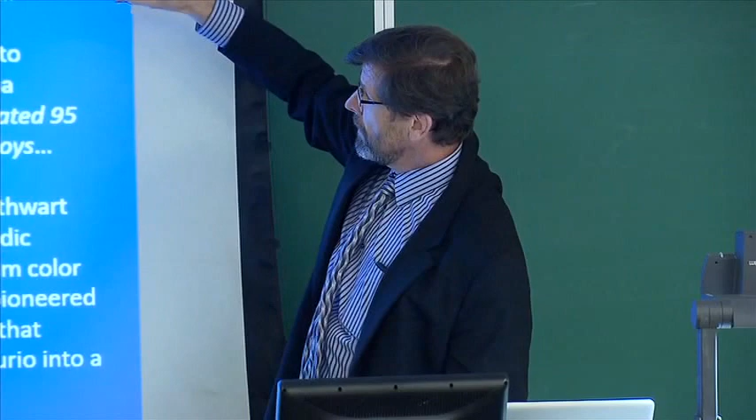The green light, the other meaning of the green light, was they got the permission to spend $30 million on the tech center. If I plug this into the Google calculator for inflation, that's about $240 million today.

So the investment in basic science was equally recognized, as much as education, as much as practical application. And the reason is this connection: it is basic science that really underpinned all of the technical applications of aluminum. Without the basic science, aluminum would still be sort of a curio. With basic science, you can turn it into something that performs in highly demanding engineering applications.

So the third generation is the lectureship. The endowment from Kent created the library. The endowment was sufficiently substantial that the next generation of Van Horns, Neil and Karl, were able to set aside some of those resources in order to endow this lectureship. And it has been running since 1974.

If you just look through the list, you'll see many names you recognize. We've had one leader in the field of material science and engineering after another come and speak to us and spend a long period of time and directly interact with the students. That's one of the real other dimensions of connectivity that's treasured about this series.

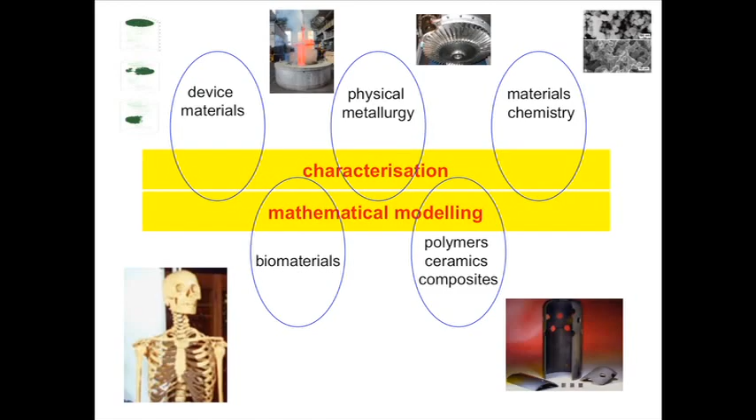And there's another subject key to all material science subjects: mathematical modeling. There used to be a time when it would take approximately 10 to 15 years before an idea made it into commercial success. That is no longer acceptable in industry—you have to take your idea and show it's viable within something of the order of 5 years. Rolls-Royce make aero engines, and they will not wait for you more than 5 years to get something flying in the engine.

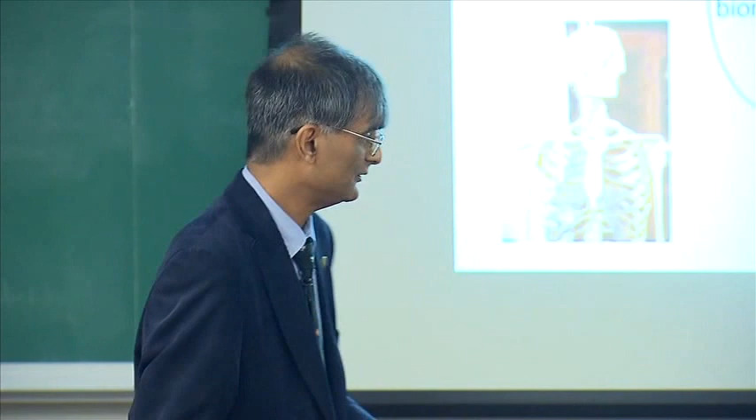Now, to do this, we have to reduce the timescales and resources used to create new materials. One way—and this is just a tool, just like an electron microscope—is to use mathematical models to cover as much information as you can so you can get to your goal faster.

And these mathematical tools are now quite common, and they form part of the language even of undergraduate students. So, for example, this is a book, quite a small book, about introducing materials modeling.

Every single method that exists at the moment for doing calculations and trying to design materials. And in that book, we cover electron theory, molecular dynamics, thermodynamics.

Irreversible thermodynamics is a subject between thermodynamics and kinetics. We have kinetics, which is a very badly behaved subject, finite elements, and the key aspect of material science is that we have structure property relationships. That is the essence of materials science.

Given that we are not a pure subject, that means we don't treat a chicken as a sphere. We have to treat the chicken in the complex shape that it exists. We will have lots of uncertainties, and the treatment of uncertainties is an extremely important part of the problem.

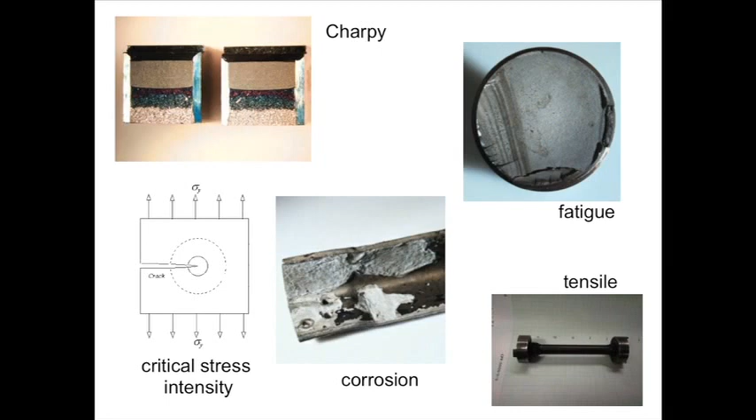It's a completely empirical test, but it's widely used. No one can predict that. Similarly, the fatigue strength cannot be predicted. This is the fracture toughness, corrosion, even the simple tensile test. We cannot predict the stress-strain curve. These are extremely complex problems.

So how can you design a material if you can't predict the properties? The engineer is not interested at all in whether you have GP zones in your material or you have a nanostructured material. They want to have properties with which they can design a component which will be safe over the service life that they calculate.

So to summarize, all these properties can be measured. We have all the necessary instruments, down from looking at individual atoms to engineering scales which cover kilometers of pipeline. And the pipeline has to be designed in such a way that if a crack starts, it doesn't propagate for kilometers.

We can use these measurements, so all of these properties that I illustrated as an example, you can use them to make sure that your best estimate says that your engineering component will be safe over a certain design life. So we can use these measurements to estimate life, to control, etc.

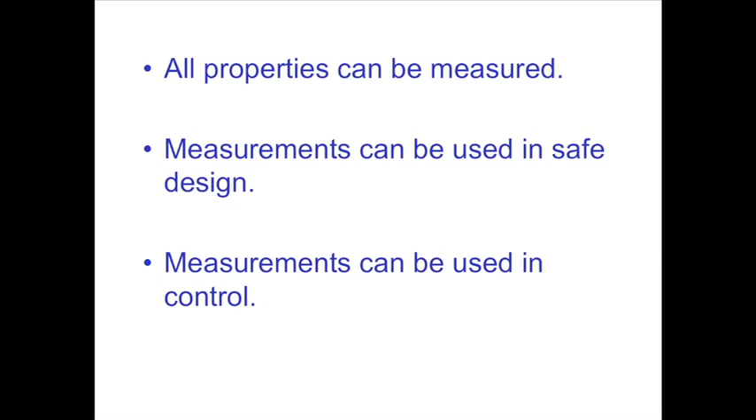But if I gave you a comprehensive description of the material, that means the full chemical composition of a steel with 20 different solutes in it, and exactly how it was processed, and the details of the structure at whatever resolution that you like, you would not be able to predict any of those properties. So this is what I mean by a complex process, and I'll give you some example of that.

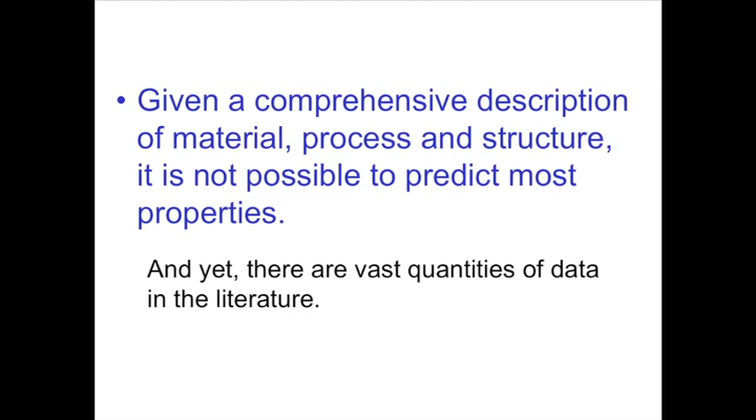So one advantage is that there exist vast quantities of data in the literature, really truly massive quantities of data in the literature. We need to do something to understand those data without simplifying the problem. Because once you simplify the problem, you lose the technology.

Even the simple hardness test, so these are hardness indents. And when we teach about hardness, we say, okay, we make a diamond-shaped indentation, right, and measure the depth to which it penetrates the material. But actually the problem is far more complex. You can see that the region around the indent has been pushed up in a complicated way. So even to predict the hardness is not possible as yet as a function of all the variables that I illustrated.

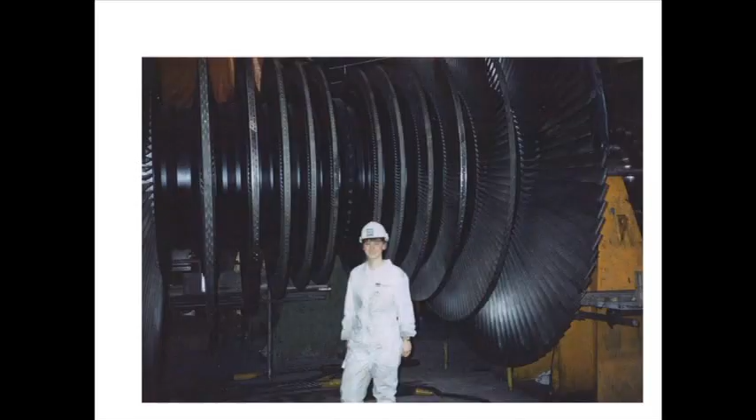Now this is a steam turbine, and this is one of my former PhD students, Tracy Kuhl. You know, this thing rotates at about 3000 revolutions per minute. The steam temperature can be 600 degrees centigrade, and it's very long along this direction. It's got to last for something like 40 years.

So to ask a question, how can I make this operate at 650 degrees centigrade and make sure that the materials will survive over that period is really tricky. You're not going to wait for 40 years to test your alloy. So we've got to have a method of dealing with this problem, and I'll illustrate some of the variables involved.

So here we have complex chemistries where everything is added deliberately. I'm not illustrating impurities. Some of these elements are added in parts per million and controlled accurately. Boron, for example, is added in parts per million. So we have all these alloying elements which form our basket of things that we can add to the steel.

There's processing involved, rolling, forging, heat treatment, etc., multiple heat treatments before and after welding, and so forth. There will be different kinds of welding processes, and they will have their individual control parameters, and there will be final quality heat treatments. Quality is the term they use for the final heat treatment.

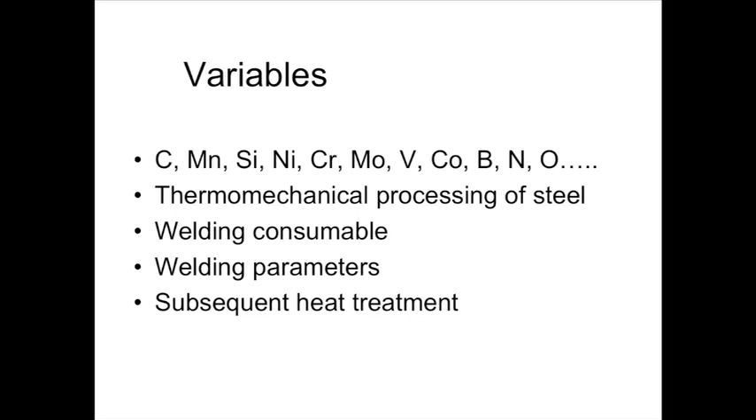So if you simplify the problem, you basically lose the technological goal of the analysis. So how do we deal with this?

Well, first thing is that there is no reason for anything to be linear. We have to have nonlinear functions, and we have to be able to deal with a very large number of variables. If you are modeling a rolling mill, there might be approximately 400 different variables. A modern rolling mill actually has these models so that it automatically adjusts the conditions so that you get the right properties.

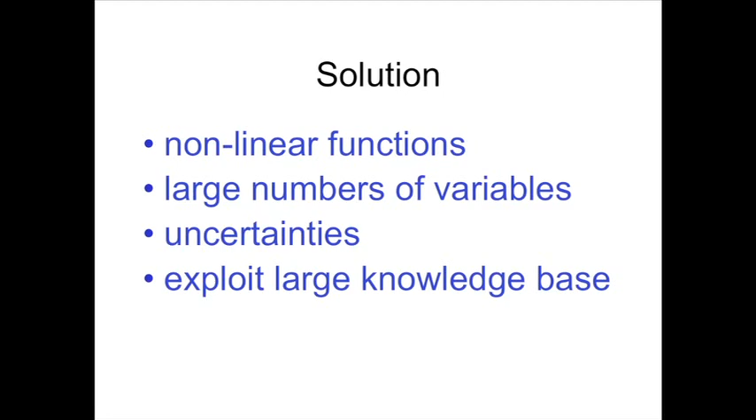This is extremely important. We need to deal with uncertainties in our calculations, and we need to exploit as much data as is available. It's a very painful thing to collect all the data that are available, and in many cases the publications don't report all the data that you need. So you need to have a method to deal with missing variables.

Okay, so the first thing that everyone is familiar with is an empirical equation. Supposing I'm trying to predict the strength of a material, I might write it as a constant times the concentration of carbon, plus a similar term for the manganese concentration, and then for the nickel concentration. So it's a linear equation.

These variables are assumed to be important, and we have also assumed that the problem is linear. So you present this to your supervisor, and he says, no, I know that carbon and manganese interact with each other. So you go away and you treat the data again, and you introduce arbitrarily a product between carbon and manganese.

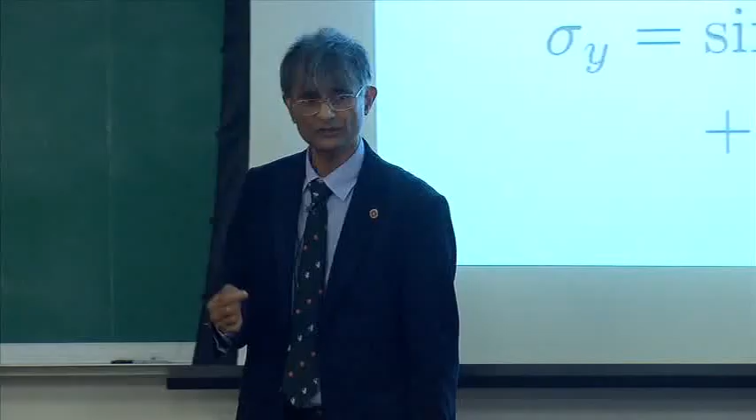When I was coming to the US on a previous occasion, the US immigration officer asked me what I was coming here for. So I explained that I'm going to give a lecture on a neural network, and I thought I should explain a little bit more, which was a mistake, because I said, look, it works a little bit like the brain. And actually it's not at all like the brain, but neural implies something to do with the brain. So he said to me, I wish my boss had a neural network.

Here is a representation of that first empirical equation where we had the property, in this case toughness, as a function of carbon, yield strength, and phosphorus content. I'm going to represent that linear equation in terms of a neural network. Here are the input nodes, your input variables: carbon, yield strength, and phosphorus concentration. And this is what we are after, we want to calculate the toughness.

So I take the carbon concentration, multiply it by an arbitrary number, which we'll call a weight. I take the yield strength, multiply it by an arbitrary number. I take phosphorus, multiply it by an arbitrary number, add them all up here, and I get a value for toughness, which will obviously be wrong unless you're very lucky. So you compare your calculated value with a measured value, and modify the weights until you get a good match. That's basically linear regression.

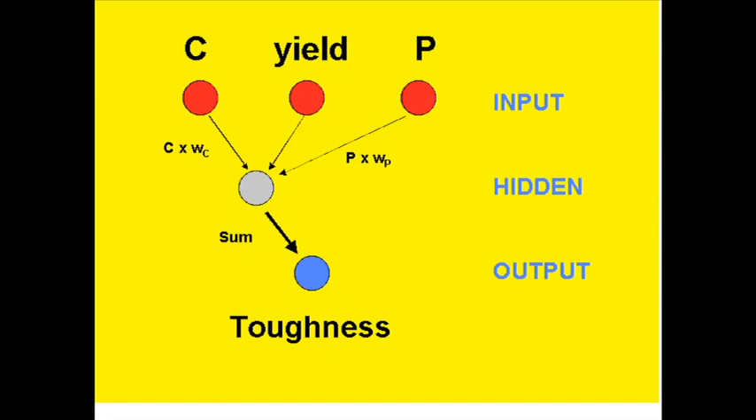In the previous slide, I had one hidden unit where I added everything up. Let me go back to show you. We have one hidden unit here, so we take carbon, multiply by a certain weight, and so on, and add them up here. I can have a second function here where I multiply by a different weight, and instead of doing a linear addition, I take a hyperbolic tangent of those products. By using two hidden units, I can make the function more nonlinear.

This is exactly what we are doing here: using two hidden units, two hyperbolic tangent functions. Carbon multiplied by a weight, take a hyperbolic tangent; yield multiplied by a weight, take a hyperbolic tangent, and so on, with two different sets of weights. This is the equation representing that neural network: the output is given by your input variable multiplied by a weight plus some constant, just as in linear regression. At hidden unit 1, you take a hyperbolic tangent of that summation, and you do the same at hidden unit 2, then predict your output value of toughness. If it's not correct, you go back and modify the weights.

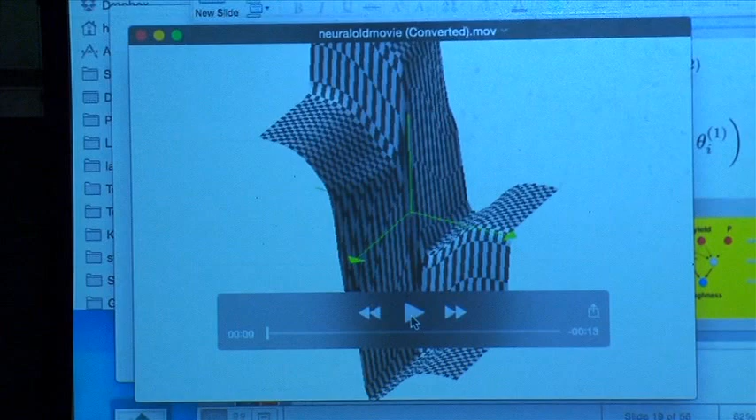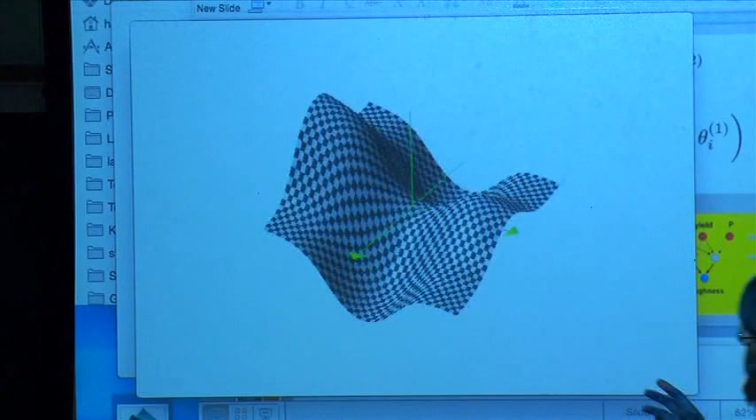To show you how complex a function you can get from a simple combination of hyperbolic tangents, here's a movie showing x, y, and z as our output. X and y are two variables, and I'm only using 4 hyperbolic tangents. As the movie runs, you'll see how that function changes simply by altering the weight. This is the same function, all I'm doing is altering the weight, with 4 hyperbolic tangents here. You can see I can make this surface sing and dance by altering the weights. It's an extremely flexible mathematical function.

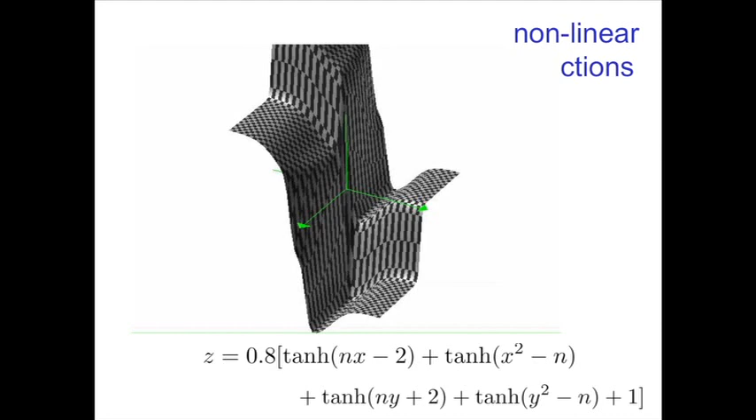That's the reason for using the hyperbolic tangent, it isn't that I had a bad dream. You can see this is not a black box, everything is explicitly defined in this equation. The complete description of the neural network is that simple equation. This was the function I was plotting, you can see there are 1, 2, 3, and 4 hyperbolic tangents, and all I'm doing is varying the weight, and the shape changes dramatically.

So you have to be brave and answer. Which one is correct? The higher order polynomial is extrapolated beyond the data range, so that wouldn't be right. It depends on your criteria for matching, whether you use least squares or least to the power of 10 - whatever you choose.

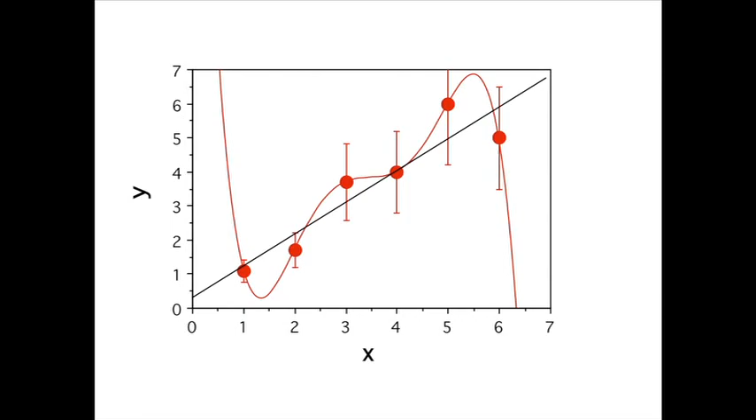I don't know what the function should be. If I have a neural network which is so flexible, I can make it pass through every single point with 0 error. But, as you said, is this a correct extrapolation? It could be, or this could be the correct extrapolation. So how do we deal with this?

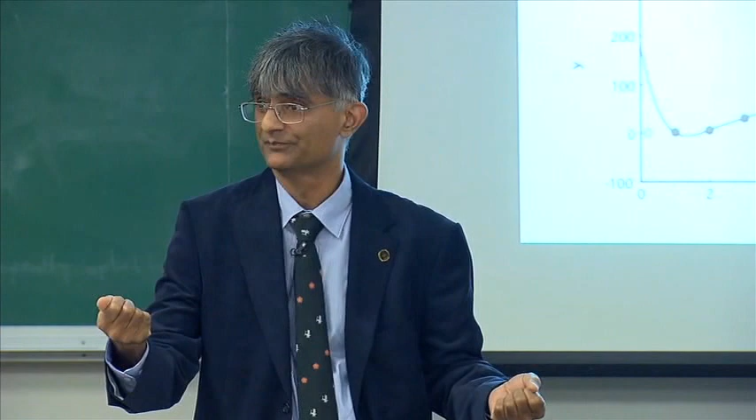Okay, the solution is very simple. I have data, and I split the data at random into two parts. One data set I call the test data, and one I call the training data. The training data are those which I use to create the function, and the test data to interrogate whether the function behaves properly.

So the black points are the ones I've used to create the model, and the white points are my test data. I'm plotting the error in the training and test data as a function of the complexity of the model. Here the model is actually too simple to capture the complexity of the data, because we're predicting the unseen data incorrectly, so we get a high test error and a high training error. In this case, I've made the function pass through every single point in the training data, and therefore it behaves badly - it's overfitted because it behaves badly on the unseen data, so I get a large test error and a small or 0 training error.

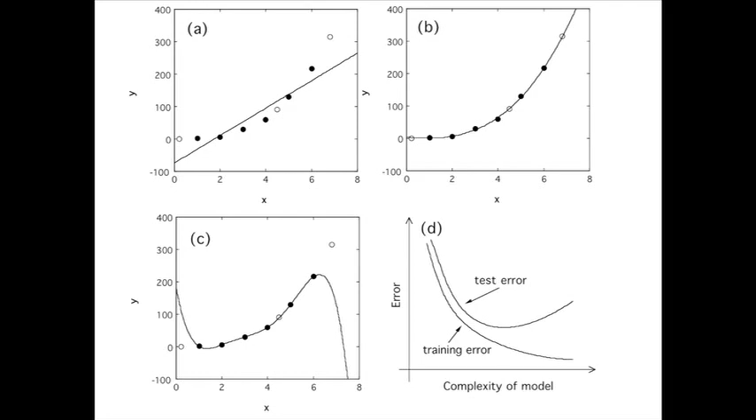This is an optimum model because I minimize the error on the unseen data. That way you can fix the complexity of the model by saying, look, I'm not overfitting here - I've got a minimum in the error on unseen data.

Just a clarification - training has confused me. Training implies change, but what that's really saying is how well does that line approximate the filled circles? Correct. Yeah, so we are finding the coefficients, the W, for fitting the function and checking how well it fits those data points. And when it passes exactly through those data points, the training error is 0.

Now, here's another illustration. Can somebody predict the next two numbers in the sequence? How about you, since you're at the front desk, you're a good student? Well, I want to say 10 and 12, but you're probably going to pull it up and it's going to be like 491. No, you're absolutely right.

So the next two numbers are 10 and 12. But they could equally well be 8.91 and 7.64, because this function here exactly represents the sequence 2, 4, 6, 8. If I put 2 in here, I'll get exactly 4. If I put 4, I'll get exactly 6. If I put 6, I'll get exactly 8. If I put 8, I'll get 8.91, and the next one will be 7.64. So 10 and 12 are exactly correct, and so are 8.91 and 7.64.

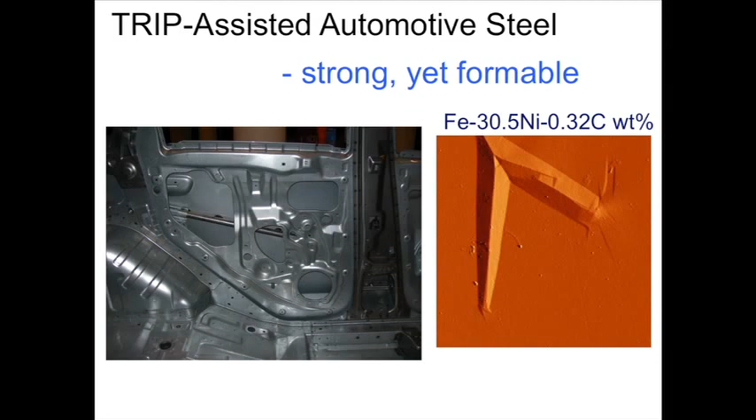And one method, named TRIP, comes from the US, where - now who was it? Parker, Zackay and Parker, that's right. They did some experiments on fully austenitic steels, and when they pulled them, they found extraordinary ductility. And the reason is that phase transformation happens under the influence of stress, and that phase transformation causes a change in shape, a shape deformation, which is a small addition to ductility, but more importantly, it adds to work hardening capacity, and therefore you do not get a plastic instability early in the deformation. If you don't get a plastic instability, you can stretch it much more. So these alloys are too expensive for normal use, something like 30% nickel.

This is a very clever alloy in which you produce austenite, which will transform under the influence of stress or strain into martensite, but incredibly cheap, using carbon as an alloying element. Now, you can't use a large carbon concentration because you have to be able to weld these things. There's approximately 3,000 to 5,000 spot welds in every car, and if those do not pass rigorous tests of fatigue and so forth, your steel will not be used. Simple as that.

So notice that the carbon concentration is very small. So how do we stabilize the austenite? If I quench this material, it would transform completely into martensite and there would be no austenite left. So what they do is first form about 70% of ferrite at a high temperature. When the ferrite forms, it partitions carbon into the rest of the austenite. So even though your average carbon concentration is 0.15, the concentration in the austenite is much greater. And you increase it further by transforming at a lower temperature into bainite, which also partitions carbon. So you end up with about 1.28% of carbon inside the austenite, even though the average is 0.15. You can't get a cheaper alloying element than carbon. In fact, during steel making, you remove the carbon from the iron that comes out of the blast furnace.

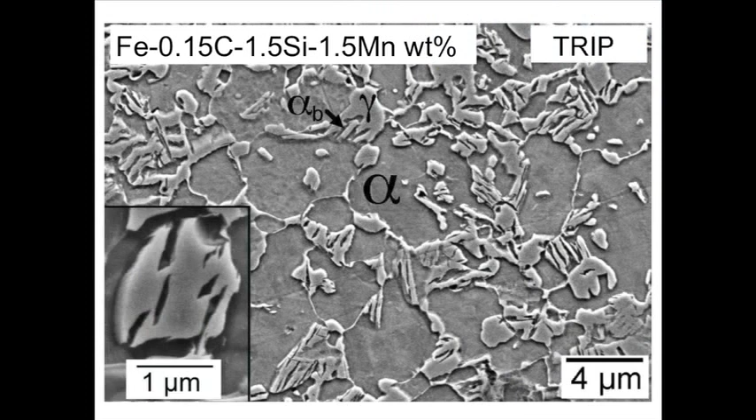So this is called a trip-assisted steel, and it has a very simple composition, and notice the silicon.

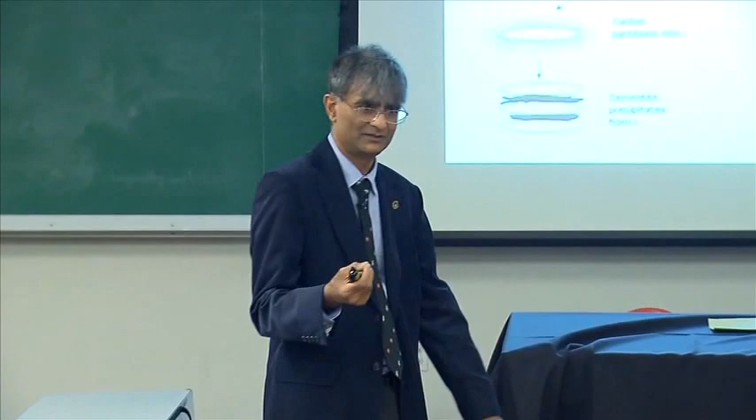As Professor Lewandowski said, bainite is my favorite topic, and I've worked on it for about 40 years, and I'll summarize all that in one slide here. So basically, it forms exactly like martensite - it's a diffusion-less transformation, but it's forming at a temperature where the carbon is mobile. So shortly after transformation, it escapes into the remaining austenite and then precipitates as carbides, iron carbides. But if we stop this reaction here, then we end up with a mixture of ferrite plates and carbon-rich austenite.

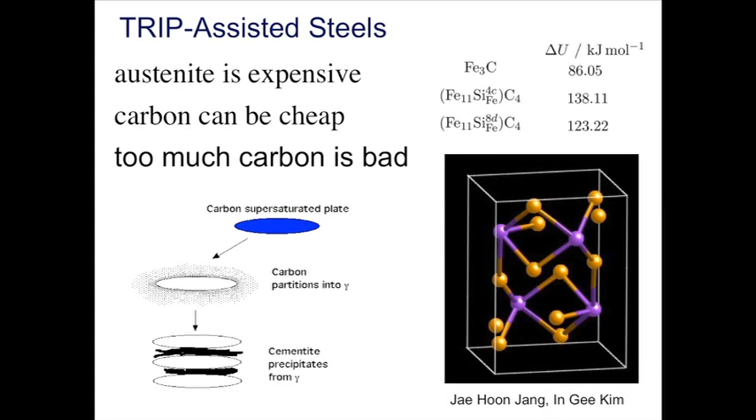And the way to stop this reaction is - this is the cementite unit cell, Fe3C. If I pull out an iron atom and substitute it with silicon, then you can see that the energy goes up dramatically. Cementite hates silicon. So if you add a small amount of silicon to your steel, then cementite will not precipitate in these circumstances. So the role of silicon is basically to allow us to produce austenite, which is rich in carbon, and not to lose the carbon by precipitating cementite.

And the second thing about this bainite reaction is that there is a shape deformation. So this is an atomic force microscope image where you take a crystal of austenite, you polish it completely flat, and then you allow it to transform into bainite. Then you get these massive deformations, which are good for work hardening. And work hardening prevents plastic instability.

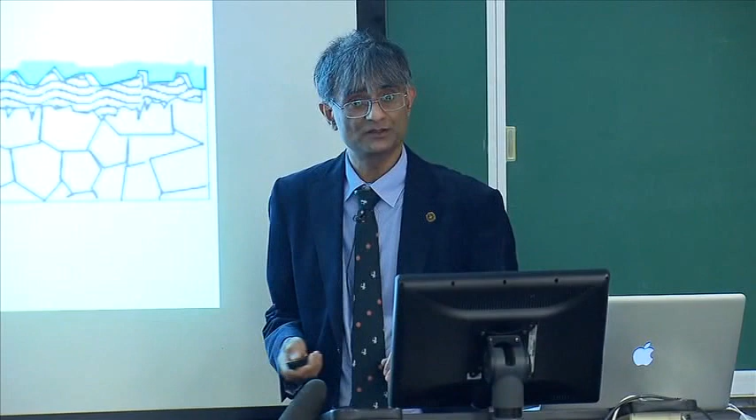So these are called TRIP-assisted steels because the amount of austenite is quite small - it's about 15%, and it's produced by this partitioning of carbon. But as your wonderful student pointed out, there's a problem - silicon forms an oxide during the processing, which is called fayalite, Fe2SiO4. And that can be liquid at your heat treatment temperature, so it penetrates the steel and locks itself to the steel.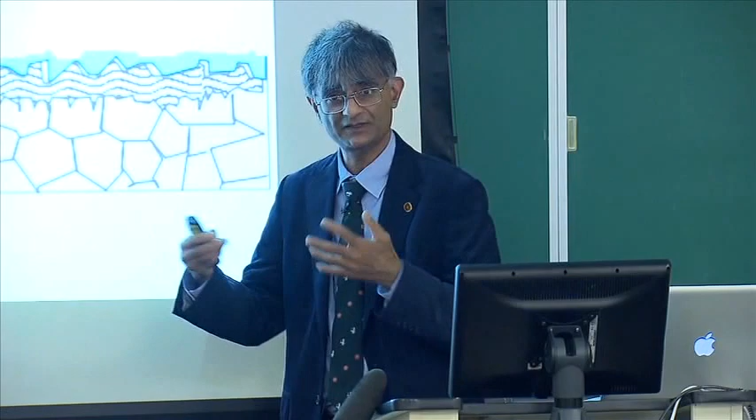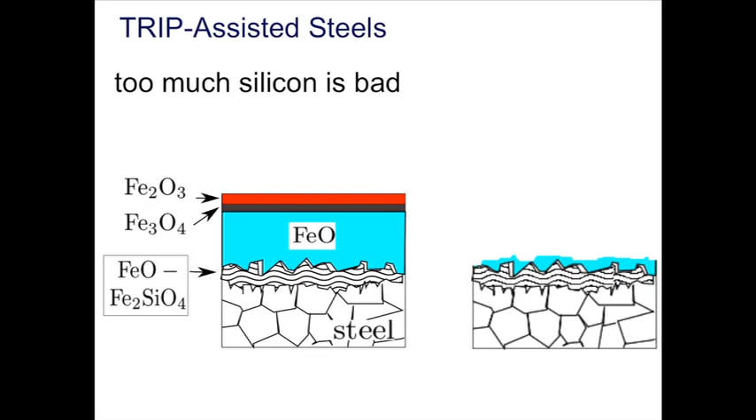So when you come to remove the oxide by the processes that I have in the steel industry, you are left with some remnants of this iron oxide because it keys with the fayalite. And that iron oxide then oxidizes to a red colored oxide, which is unacceptable just from looking at the steel. But it's even more unacceptable when you go to coat it with zinc because it doesn't wet at those points. So we don't really want any blotches on the surface, external surfaces of a car body. Yeah, you wouldn't buy it.

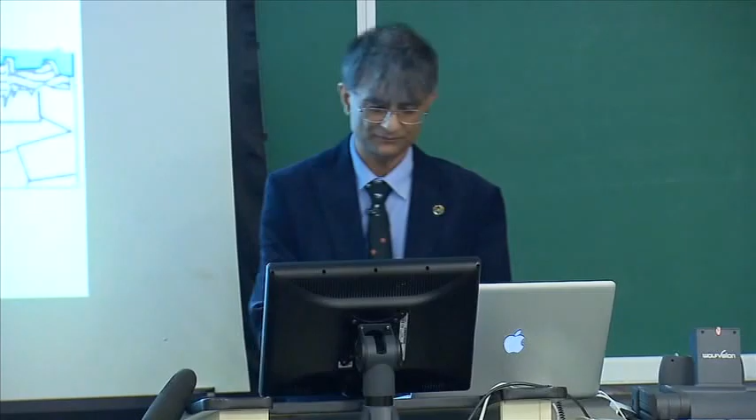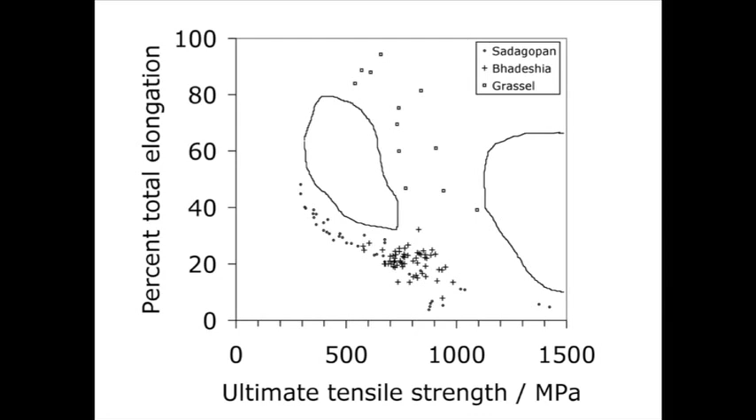So how can we solve this problem? Well, there's an awful lot of variables in producing this steel, and I'll just show you the properties that we are after. So if I take all kinds of automotive steels and I plot the strength and the elongation, which is important in formability, against strength, you get the so-called banana plot - as you increase the strength, your ductility goes down. There are some special steels called twinning-induced plasticity steels, which are rich in manganese, which have a higher combination of strength and elongation, but they are actually very expensive. So we have these large gaps here, and if you can fill those gaps, then you would become rich.

Now remember that you're not simply going to look at elongation and ultimate tensile strength. There are so many properties that have to be satisfied before a car manufacturer will accept your steel, but I'm keeping the story simple here.

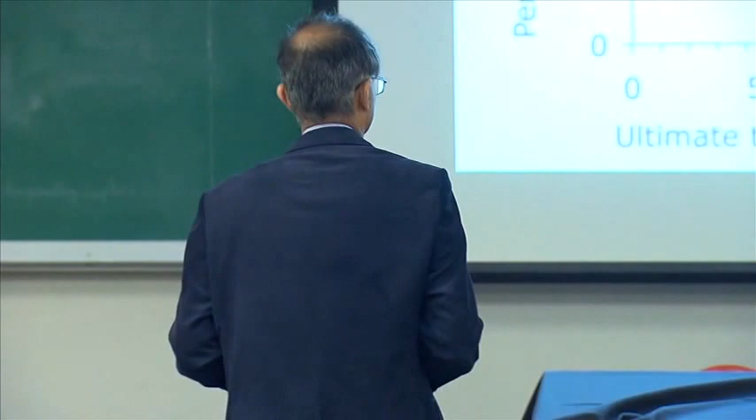This is ideal because there are thousands of papers on trip-assisted steels where people have varied many things and produced good experimental data. So we collected that data and created a neural network model, asking: I do not want a silicon concentration more than 0.5%, but I want the following properties - a certain amount of retained austenite, certain elongation, and certain strength values. Find me a steel composition. So you connect the neural network to a genetic algorithm, which tries out many different values of these variables, looks at whether you're within the acceptable range, and finally gives you a set of answers.

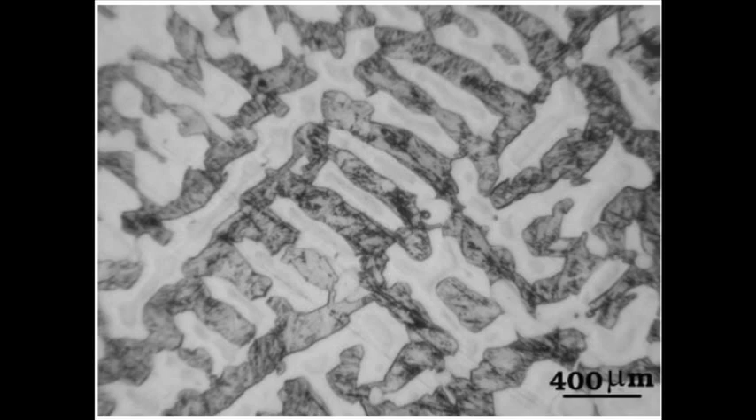And the chemical composition that was predicted is as follows: it's actually saying I can achieve all those properties with high carbon concentration, 0.40% carbon. Remember we have variables which control spot welding in the model. And silicon - we obviously force the model not to have more silicon than 0.5%. And it's increased the aluminum concentration to 2%.

And when we did a phase diagram calculation for this, you can see why we have that delta ferrite - the alloy can never become fully austenitic. Now that's an advantage. It doesn't matter whether we have delta ferrite or ferrite produced at low temperature - it's ferrite and it will partition carbon as we want. Furthermore, if it never becomes fully austenitic, it can never become fully martensitic.

So when you spot weld, you have very rapid heating and very rapid cooling. If you have a high carbon concentration, you get brittle martensite forming. But if you cannot form 100% austenite, you cannot form 100% martensite. That has to be good for spot welding.

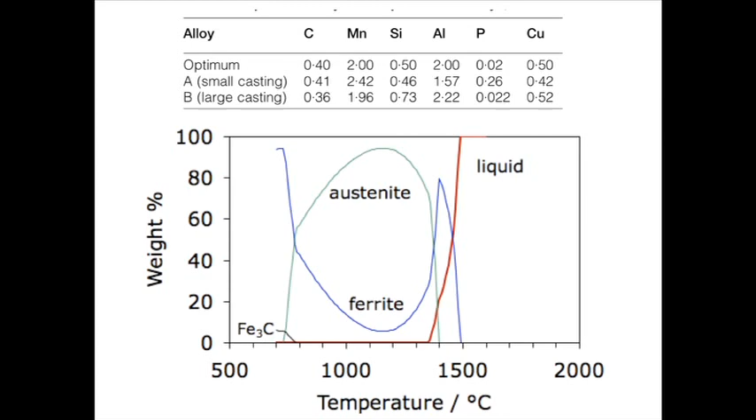Now, the way you work with mathematical models is you make some prediction, and there are uncertainties. So you do not make a large quantity of material - you first make about 60 grams of material to validate your prediction. And if it's going roughly in the right direction, you make a larger casting. Of course, when you make these castings, the compositions won't be exactly correct.

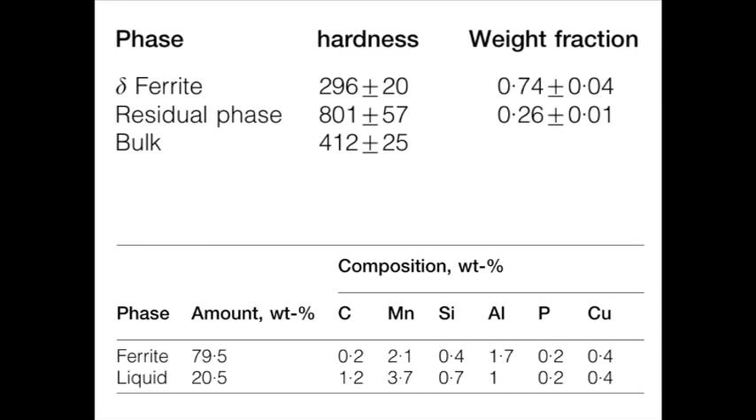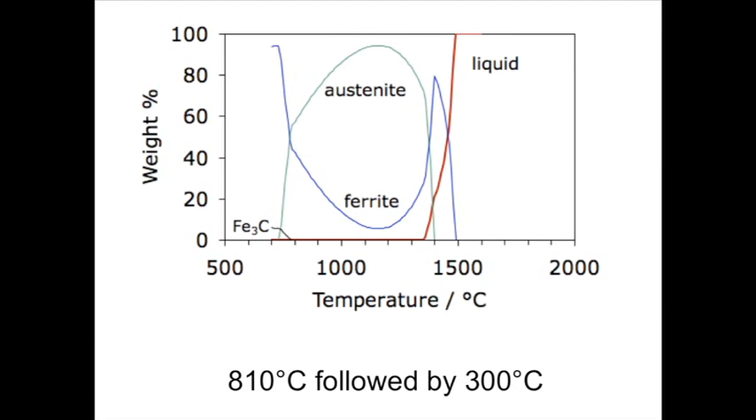This is the constitution - there's about 80% total of ferrite, and then the remaining liquid solidifies into austenite. This is now the recalculated phase diagram for the actual alloy we made. And we then heat treated this alloy to produce bainite in the regions which are austenite, so it looks slightly different here.

So this is the very first alloy - there's no making 10 alloys and choosing. We have the bainite and retained austenite here, and this is the delta ferrite that is unchanged from solidification. And the very first alloy produced incredibly good properties. For an automotive steel, this is very high strength, 1000 megapascals, and you have uniform elongation of the order of 22%.

Uniform elongation is what matters, not what happens after plastic instability. And if I measure the retained austenite content at the beginning, it's the correct amount, 15% as I mentioned earlier. And as a consequence of deformation, some of that transforms into martensite, which leads to work hardening, which you can see here.

And we seem to have almost the right amount of work hardening. That means if you have work hardening which is very steep, it gets too strong, and then it will break. You want a curve which is something like this, where the austenite transforms gently.

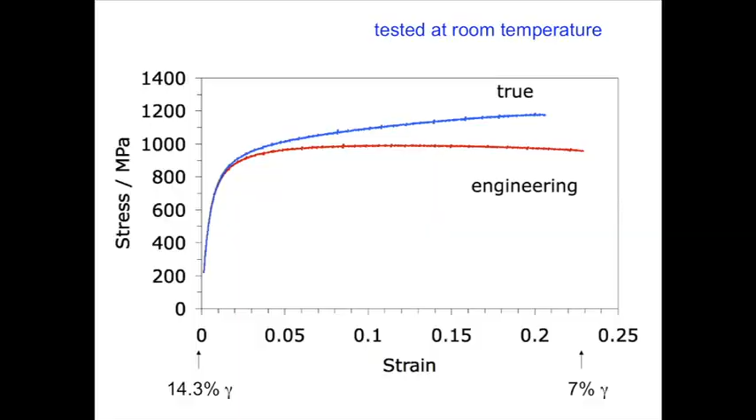Now, to prove that it's the transformation of the austenite that is helping us get this elongation, we did this tensile test at 100 degrees centigrade. Now 100 degrees centigrade doesn't do anything to the microstructure because it's produced by transformation at about 300 degrees centigrade to bainite. But it alters the stability of the austenite to martensitic transformation. The austenite becomes more stable. So if the austenite doesn't transform, we should get a lower elongation, and that's exactly what happens.

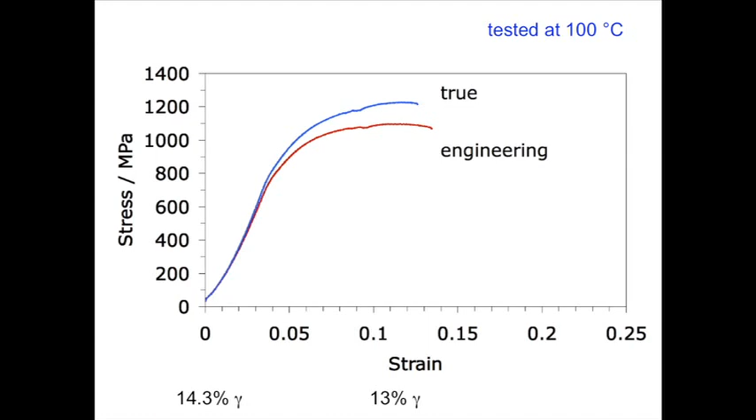So here is the test done at 100 degrees centigrade, and you can see the austenite is not actually transforming. So it's the transformation of the austenite that gives us the elongation.

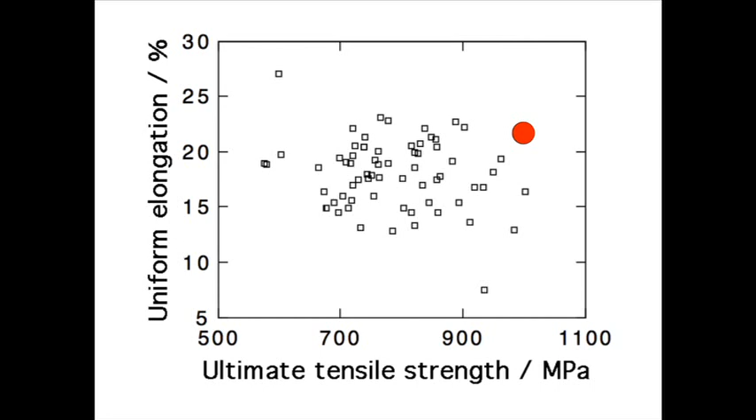And if you look at all the commercial TRIP-assisted steels, this is the alloy obtained the first go, from the prediction to making a small melt. And then, of course, there's a lot of other work to be done to measure weldability and hundreds of other parameters. But that gap that I was telling you about is filled.

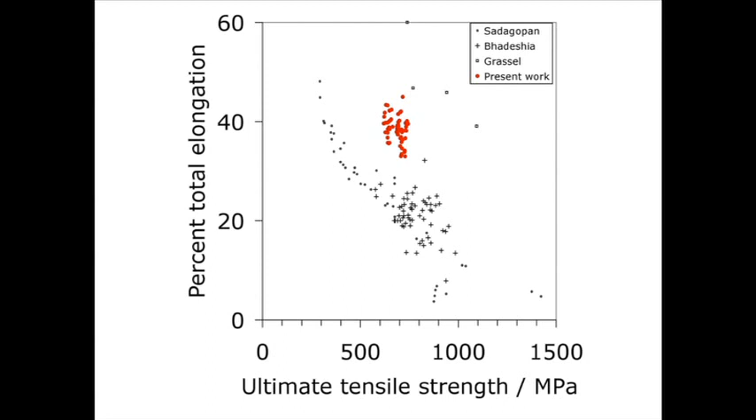And furthermore, the addition of aluminium reduces the density of the steel by 5%. So the specific strength is even higher.

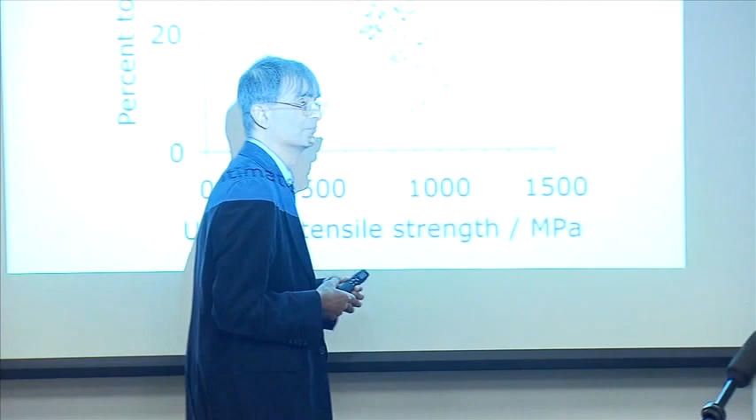What would be a grain size in these types of alloys? Because your delta ferrite is... yeah, it's there. So it's not particularly fine, but we have the austenite and the bainite and then the martensite distributed throughout the structure, which gives the strength.

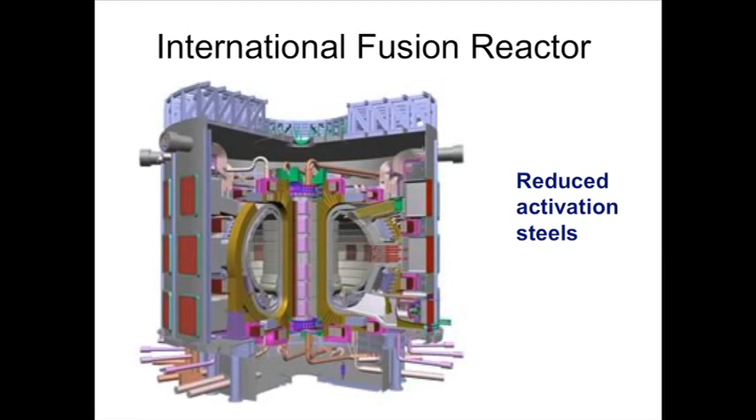Now, this is a fusion reactor, and the current one that is being built in France, an international project, there will be approximately 200 displacements per atom during the lifetime of that process. So if you have a material in there, every single atom is displaced from its position 200 times during the lifetime. Just imagine that.

So that is a damage level which is far greater than in a fission reactor. But we do not have any knowledge about materials behaving under these circumstances, and there is no experimental facility in which you can expose the material to 200 dpa of damage. And yet we are going to spend several billion pounds in making this reactor. So how do you cope with that?

In this case, you have absolutely no choice except to do some kind of modeling. And you do modeling on the basis of the data that you have, which is from the fission program, where the dpa at most goes up to something like 30 displacements per atom.

But the point is that in about 5 or 10 years' time, there will be an experimental facility which is not a fusion reactor, which will allow very large doses of radiation. But the volume of material that can be exposed to that is quite small. So if you want space in that volume, it's like sending a sample into space to do an experiment. You have to really, really justify that you've done your thinking to do that.

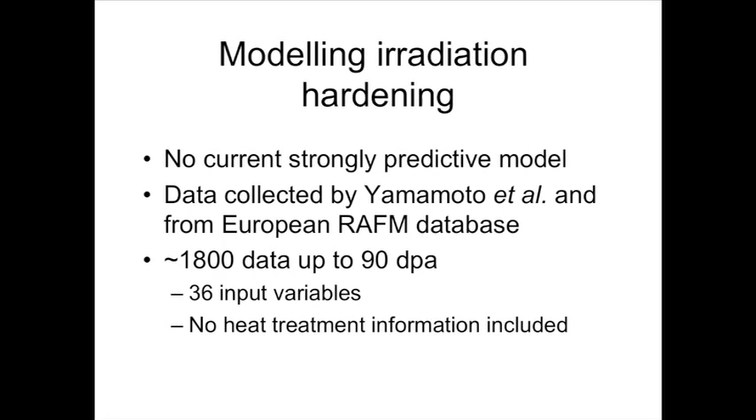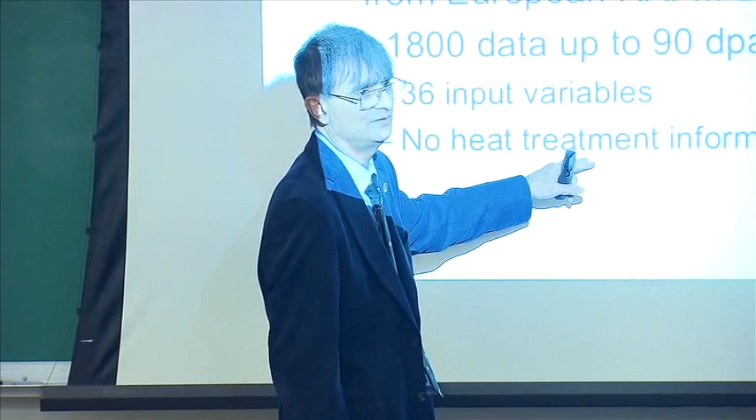There is data collected, vast quantities of data, because in the nuclear industry you are very systematic in keeping data. We have 1,800 data which go up to 90 displacements per atom with 36 input variables, but they do not include any heat treatment information. But we know the chemical composition, and we know something about the properties. So the lack of information on heat treatment is a major, major shortcoming of the scientists who have worked on this problem.

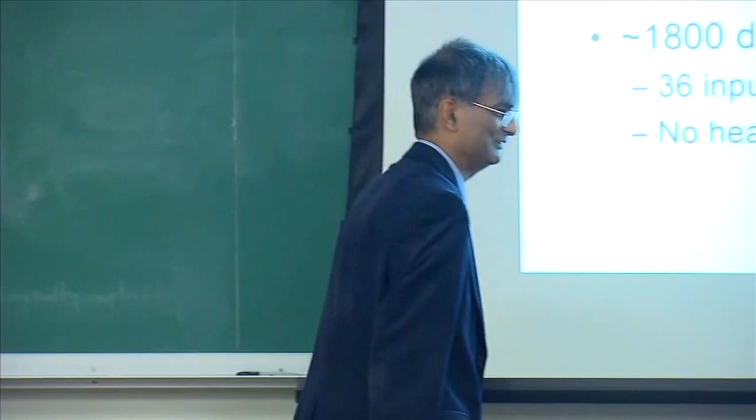If you had asked any metallurgist before collecting these data, they would have said heat treatment should be included in reporting your results. So the idea is we want to do experiments in regions where data do not exist, because there's a limited amount of volume that will be available.

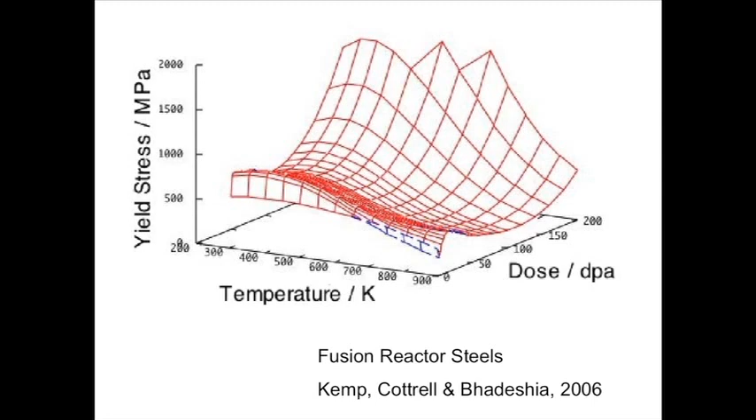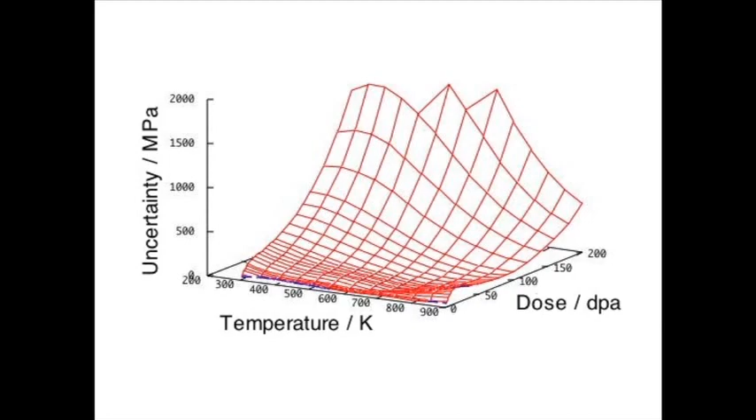But the more interesting part is to look at the uncertainty. This uncertainty defines where we need to do experiments. So the purpose is not really to predict the hardening, but to predict the regions of that complicated input space of 36 variables where experiments are necessary. We don't need to do experiments in this region where the uncertainty is small. So we are using this in order to define where the experiments are necessary.

Going back to the problem of the steam turbine: to get greater thermodynamic efficiency, we need to raise the steam temperature beyond 600 degrees centigrade, even to 700 degrees centigrade. There is no ferritic steel capable of this. We tried very hard to develop one, with major international programs, but they haven't been successful. If you use an austenitic steel, you can reach that temperature, but its thermal expansion coefficient is too large, causing thermal fatigue and other problems.

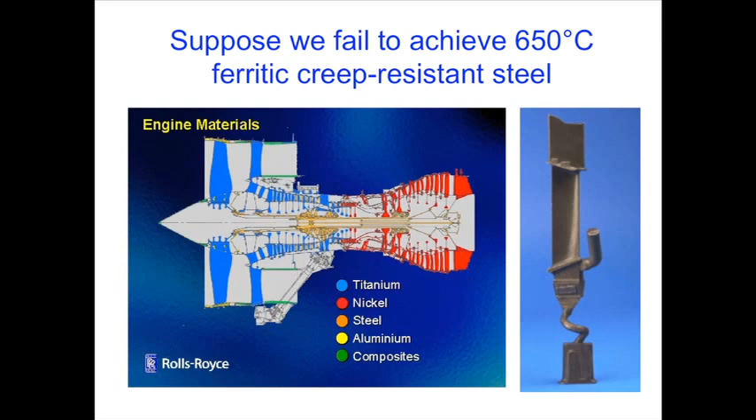So what do we do? We have creep-resistant materials used in aircraft engines at 1400 degrees centigrade. These blades are nickel-based, single crystal blades, used in an environment at 1400 degrees centigrade, rotating at 25,000 RPM. But the cost of this material is incredibly high. In an aircraft engine, where you use small quantities, that's fine, but you couldn't possibly use this for a steam turbine. So the idea is we need to downgrade this material, removing all the expensive things, because we only need a temperature of about 700 or 750 degrees centigrade, not 1400.

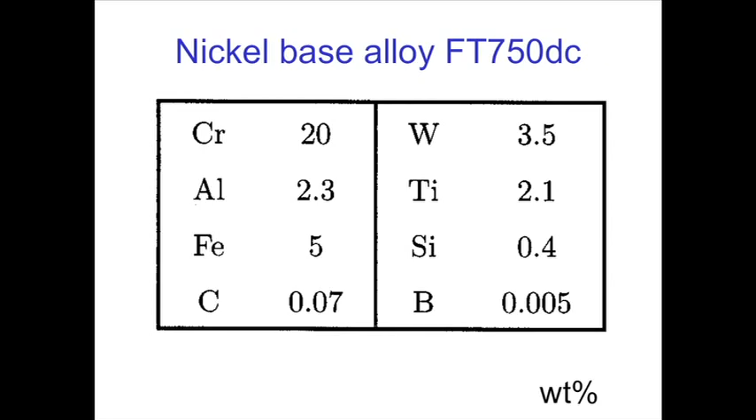Again, we have a very large quantity of data, and we designed a steel using the neural network—not a steel, but a nickel-based alloy. This is the composition we came up with. Notice there is iron, which is not good for nickel-based alloys, but if you allow iron to be there, the price goes down because you can use scrap material. It's a much simpler composition than any nickel-based alloy used in aircraft engines—there's no rhenium, ruthenium, and so forth. We call this alloy FT750DC: FT for Franck Tancret, my postdoc who worked on this; 750 for 750 degrees centigrade steam temperature, 100,000 hours, 100 megapascals stress; and DC for dirt cheap.

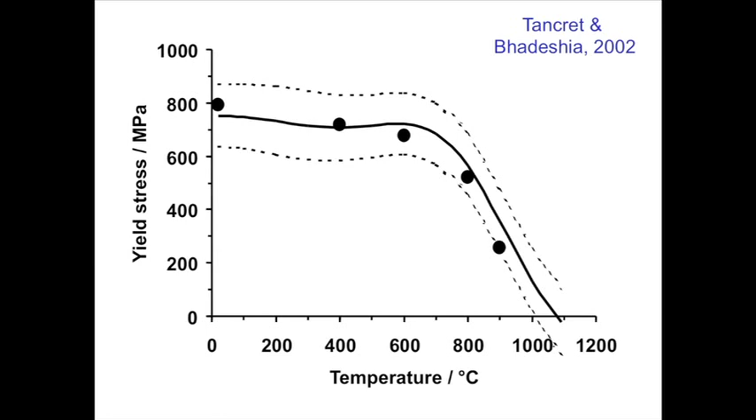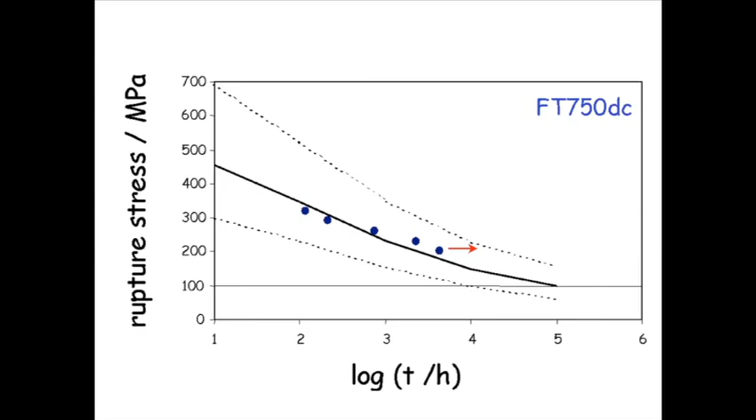There are many examples like this, where at the first go you roughly reach the right composition, and then there's a lot of work to make sure you can manufacture it in large quantities. So we go from 60 grams to 100 kilograms and then to 9 tons of material.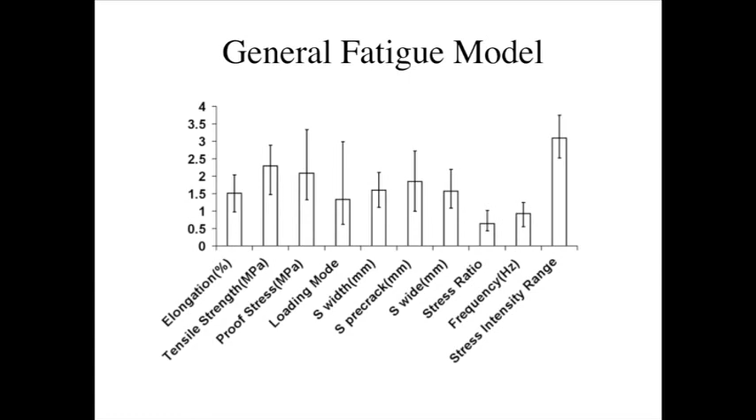Now, many people here work on fatigue, including variations like rolling contact fatigue, but this is about fatigue crack propagation. We created a neural network model with these variables—no chemical composition, no heat treatment. This model should apply to anything, even though it was created on steel data; it should apply to any material. Let's see if that works, because you could argue that composition and heat treatment are embedded in these variables like strength and elongation.

So this is the model being tested on unseen steel data. This is the threshold fatigue crack growth intensity, and this is the Paris law region.

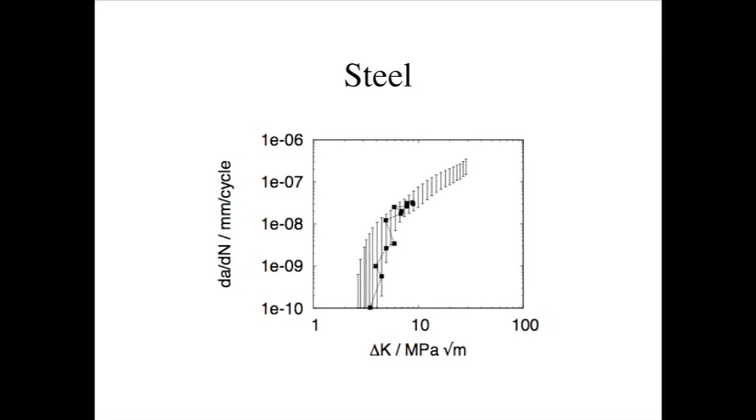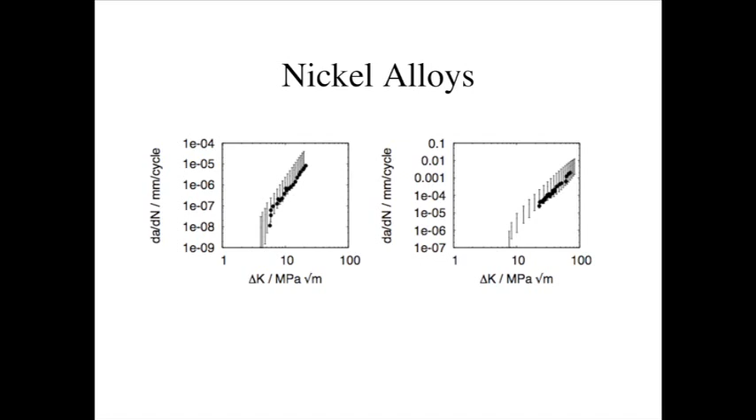You apply exactly the same model to a completely different alloy system—none of this data is included in the model. This is now nickel alloys, and you can see the predictions are pretty good, because the variables that influence fatigue are captured in the input variables we chose. Here's titanium alloys and aluminum alloys. I'm very impressed by this.

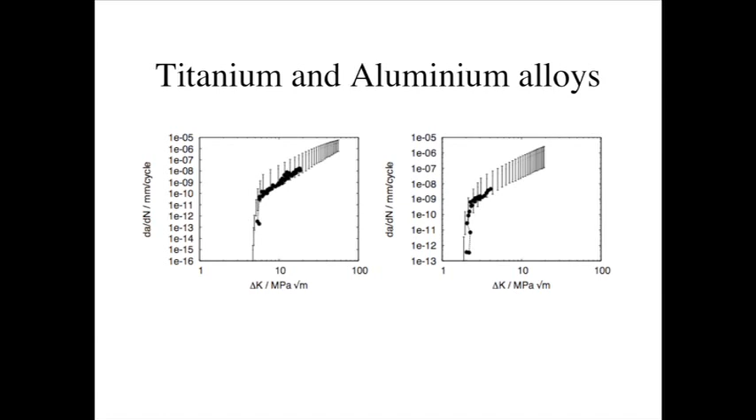There are many, many other examples, and there's a review article I wrote in 1999, which you can download from the website, showing a vast number of subjects using this method to simplify complicated problems. That, I think, is my last slide, so I'll be happy to answer questions. Thank you.